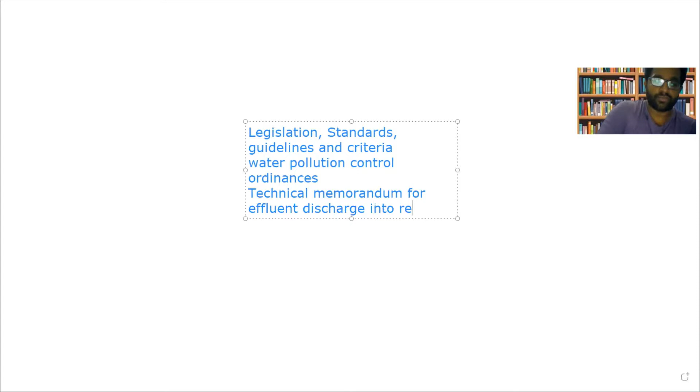Second one is the technical memorandum for effluent discharge into receiving water. And there is one more thing, that is the environmental impact assessment ordinance. So these are the three things which we have to cover.

What are the legislation, standards, guidelines, and criteria regarding the assessment of impact on water? First, what are the ordinances for control of water pollution? Secondly, for discharging effluents into receiving water: we have a receiving water body, and into it different kinds of effluents may be discharged as part of the project. For the discharge of effluents, there is one specific technical memorandum to be followed. And finally, the environmental impact assessment.

So what are the pollution control ordinances? I don't think we need a greater discussion because it is already known: what measures are implemented for controlling the pollution of water. Coming to the second one, the technical memorandum for effluent discharge into receiving water. We have already discussed in environmental engineering 2 the disposal of waste, how sludge or wastewater is disposed after treatment. There are certain limits for checking whether disposal to a particular water body is feasible or not.

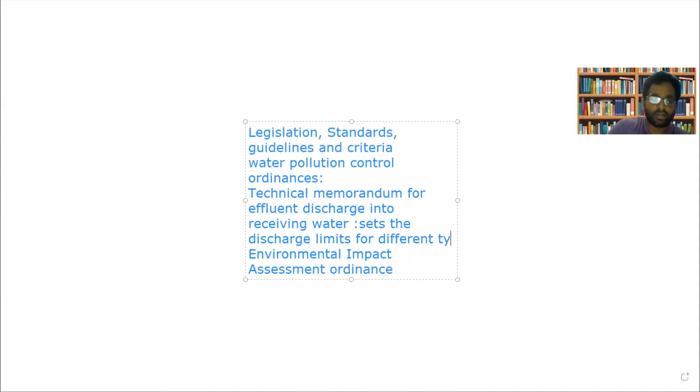So here it sets the discharge limits for different types of receiving water. And the final one is the environmental impact assessment ordinance: what are the assessment methods and criteria for environmental impact assessment? So these are the three things to be taken into consideration.

What are the ordinances put forward for control of water pollution? Second, for specifying effluent discharge, what is the technical memorandum to be followed? And finally, what environmental impact assessment ordinances are available?

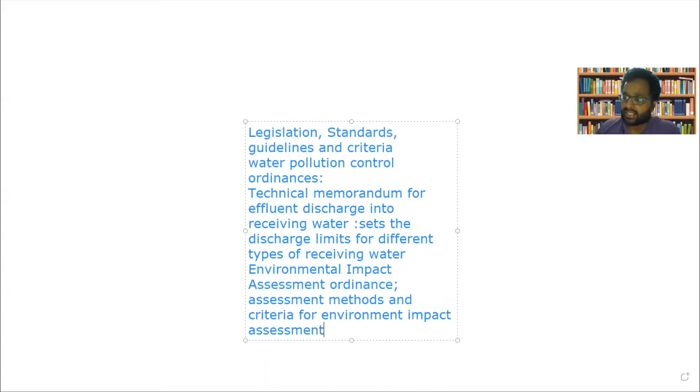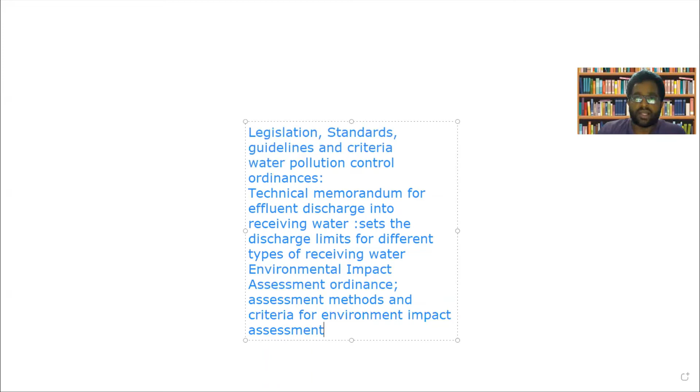Now, the inland water is specified into different groups based on the technical memorandum. The groups of inland water are Group A, Group B, Group C, and Group D. Group A involves potable water supply.

Group B includes irrigation. Then pond fish culture is in Group C. And finally, Group D is general amenity. So these are the different groups of inland water: Group A is potable water supply, Group B is irrigation, Group C is pond fish culture, and Group D is general amenity.

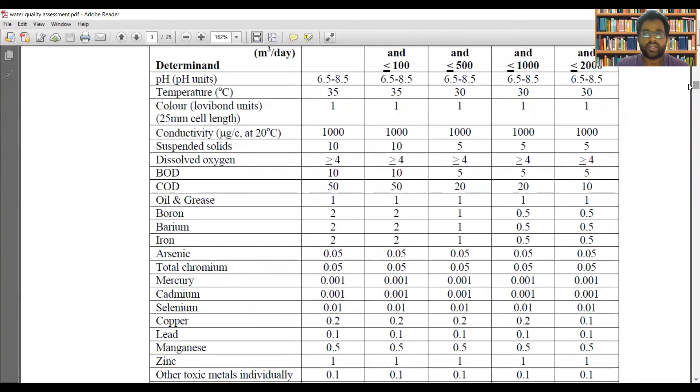Now let us see the standards for effluent discharge. There should be a technical memorandum for the standard for effluent discharge. Once an effluent is to be discharged into a water body, there should be some technical specification. In this table you can see the standard for effluents discharged into Group A inland water, which represents potable water supply. What should be the standards for effluent discharge into such a body?

Here the chemical and physical characteristics of the water are listed in this column, and in the adjacent columns we see different flow rates, from less than or equal to 10 cubic meters per day up to greater than 1000 and less than or equal to 2000 cubic meters per day. Depending on the flow rate, the different physical and chemical characteristics are listed.

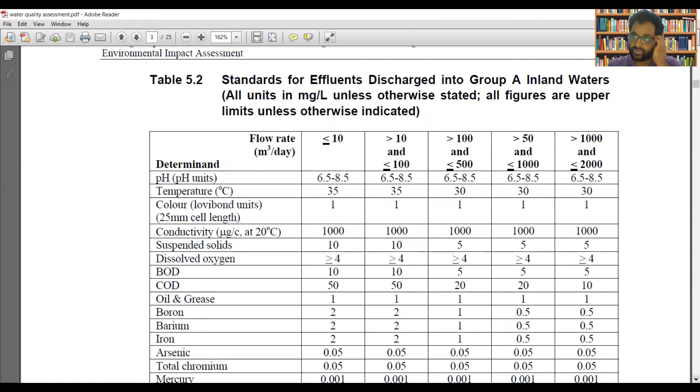The pH is in the range of 6.5 to 8.5. Temperature is 35. Then color has a unit, conductivity, and so on; for different characteristics there are effluent discharge standards into Group A inland water sources. Similarly for other groups; this is for Group D, the water used for general amenity purposes.

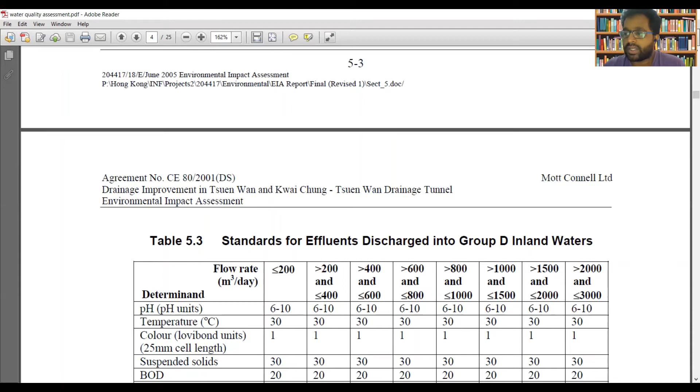For your convenience, I am repeating it once more. Group A is for potable water supply. Group B is for irrigation. Group C is for pond fish culture. And Group D is for general amenity. So this is the standard for effluents discharged into Group D inland waters.

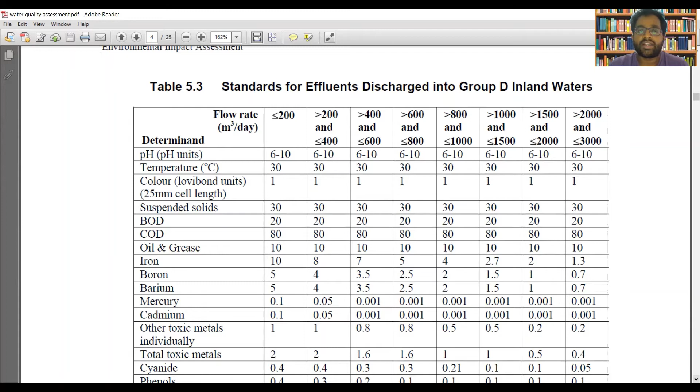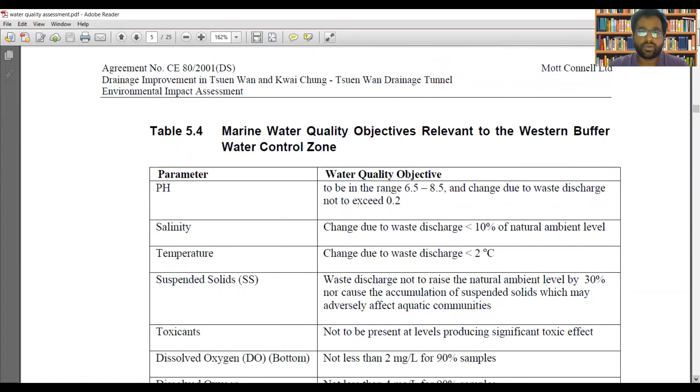These are the physical and chemical characteristics: pH, temperature, color, suspended solids, BOD, COD, oil, grease, iron, all these things are given here. And here the flow rate is given in meter cube per day. Okay. So that's it about the different discharge standards into different types of water. Now, this is the water quality objective. I'll share this PDF with you so you can read it for yourself.

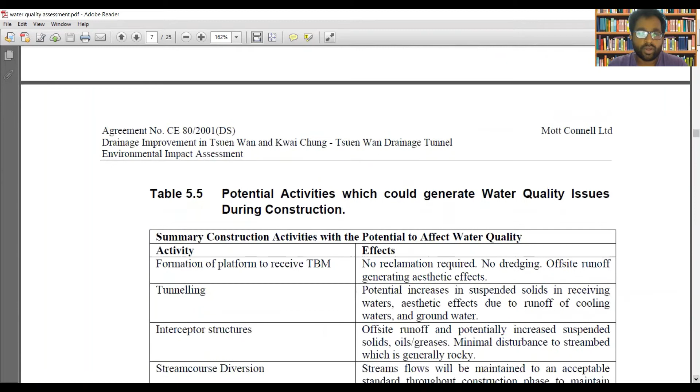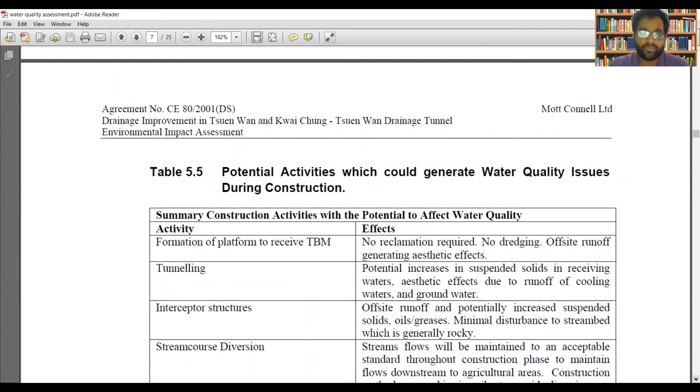Now, these are some of the potential activities as part of the project which can generate water quality issues. During construction, these are the potential activities which may generate some issues to water quality. Formation of platform to receive TBM. There is no reclamation required. There is no dredging. And the only problem is aesthetic effect. The aesthetic effect is due to runoff from the site. Next one is tunneling activity.

What is meant by formation of platform to receive TBM? TBM means tunnel boring machine. Okay. So in order to install a tunnel boring machine, a platform is to be formed. So as a part of this activity during construction, some effects are observed.

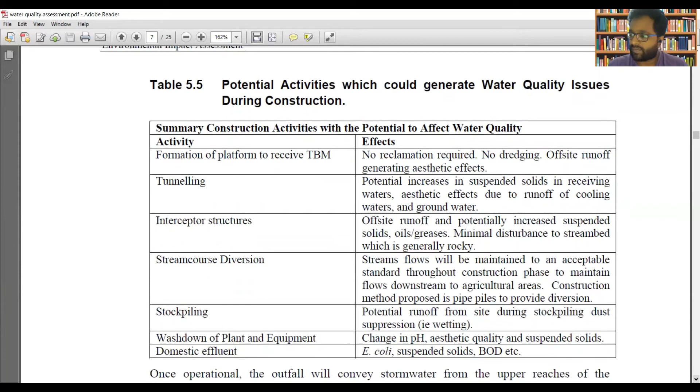Next one is tunneling. As part of tunneling, there is a potential increase in the suspended solids in the receiving waters, and aesthetic effects due to runoff of cooling water, groundwater, etc. So that's it. Interceptor structures, stream course diversion, stockpiling, etc. These are the different activities, and the corresponding effects are also mentioned here. You can read for yourself.

Next one, water quality monitoring. The water quality is to be monitored at two different conditions. One is during dry weather season, and the other one is during normal or wet weather condition. For example, if there are 8 monitoring tests in total, 6 tests will be monitoring in dry weather condition, while the other 2 events will be carried out after rain.

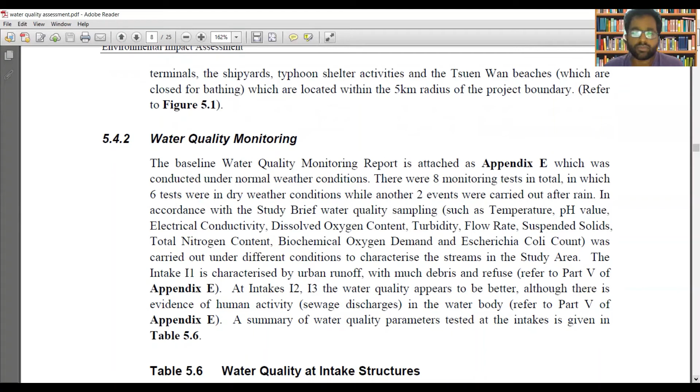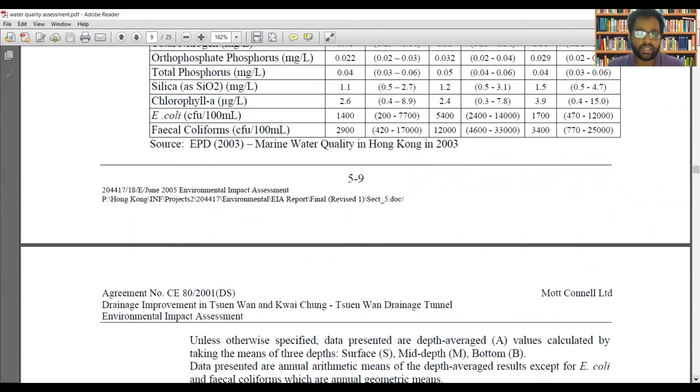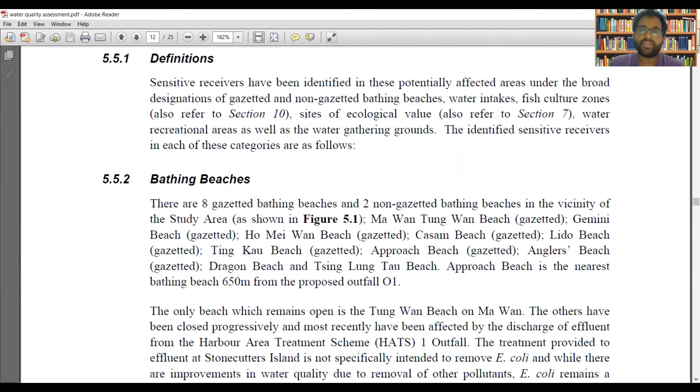Next one is sensitive receivers. Depending on the sensitivity of the receiving water body, there are certain characteristics. Sensitive receivers means in these potentially affected areas, there are different receivers identified depending upon the sensitivity. So the different sensitive receivers include gazetted and non-gazetted bathing beaches, then water intakes, fish culture zones, and sites of ecological value.

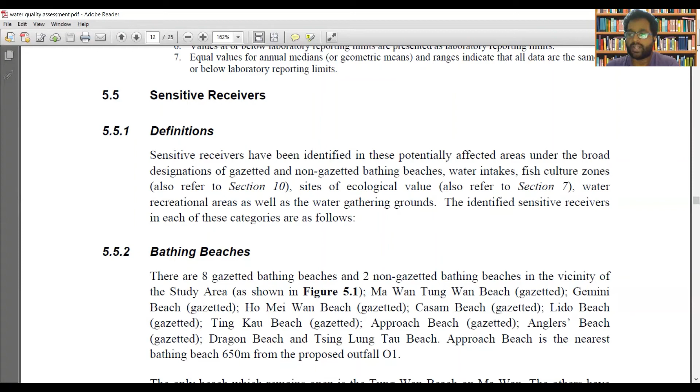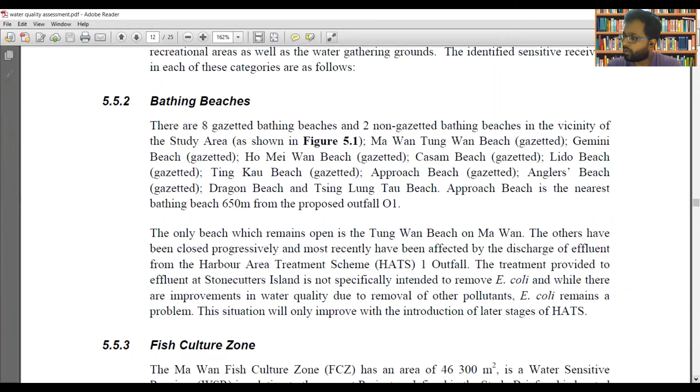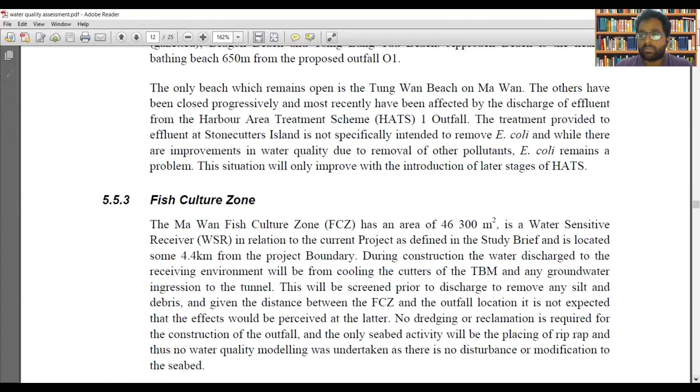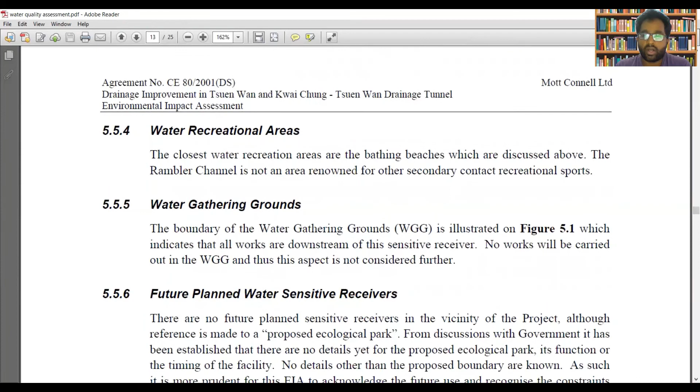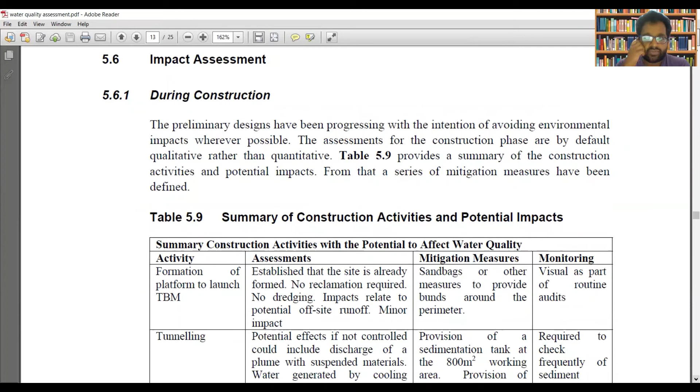Another one is water recreational areas. Then water gathering grounds. So these are the different things to keep in mind when we are discussing the impact on water. Now, let us see the impact assessment during construction. Formation of platform to launch the tunnel boring machine is one activity. As a result of this activity, there is no need of reclamation, no dredging. The only problem is runoff from the site. So it's an impact of minor magnitude.

So what are the mitigation measures? We have to provide sandbags or other measures which can be kept around the perimeter. Monitoring is done as part of routine audit, just visually. There is no need of any other sophisticated method because it can be identified by visual inspection itself.

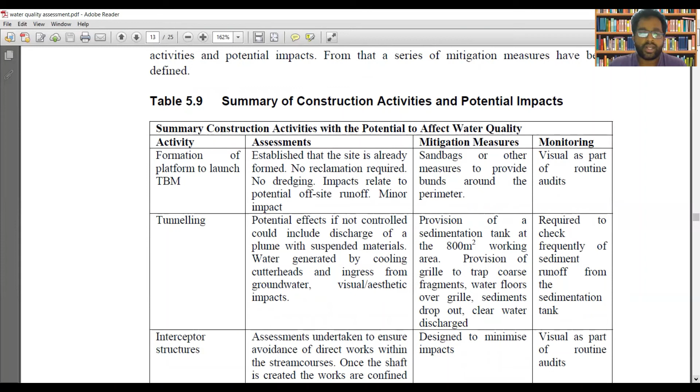Next activity is tunneling. The mitigation measure for tunneling is provision of a sedimentation tank in an 800 meter square working area. The coarser fragments can be trapped by a grille. Then monitoring: it is required to frequently check the sediment runoff from the sedimentation tank. So that is the monitoring.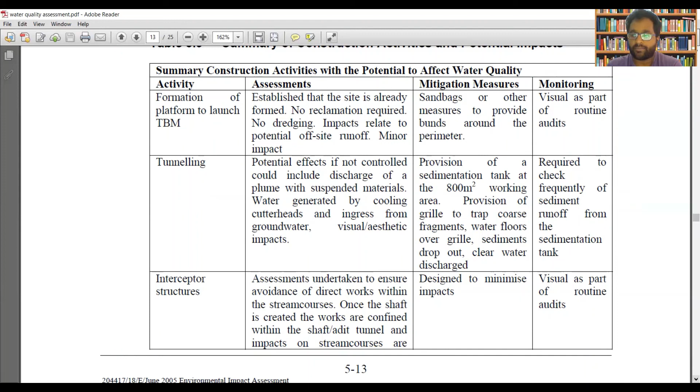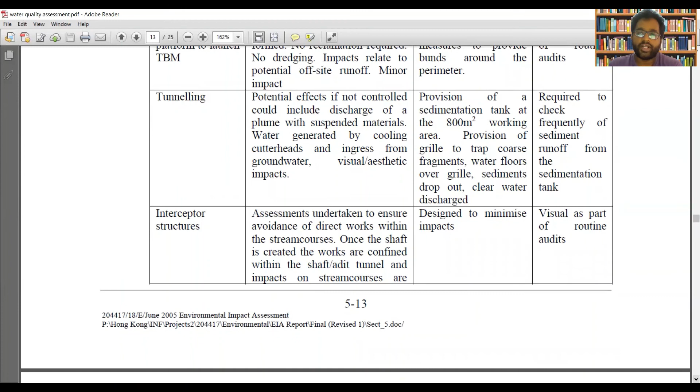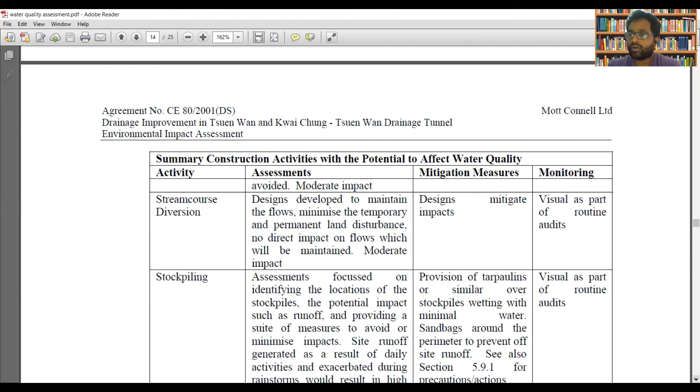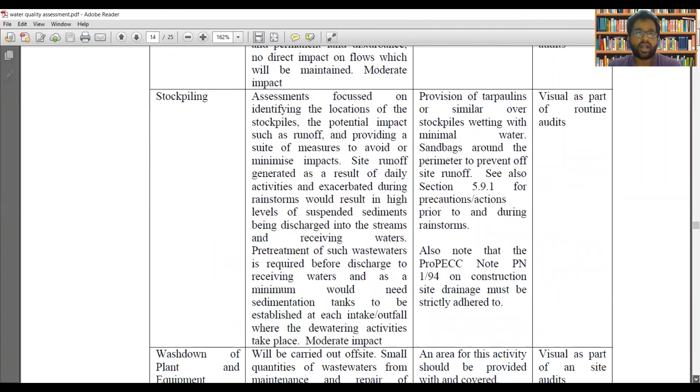Next one is interceptor structure. In order to avoid direct works within the stream courses, assessments need to be undertaken. The monitoring is visual, as part of routine audit. Next, stream course diversion: in order to maintain the flows, temporary and permanent land disturbance needs to be minimized, and there is no direct impact on flow. The monitoring is visual as part of the routine audit. So this is about the different activities and how they are monitored. I'll be sharing this PDF with you.

And we also have to discuss the impact on other environments, like air, ecosystem, socio-economic environment, etc. We'll be discussing it in the coming lectures.